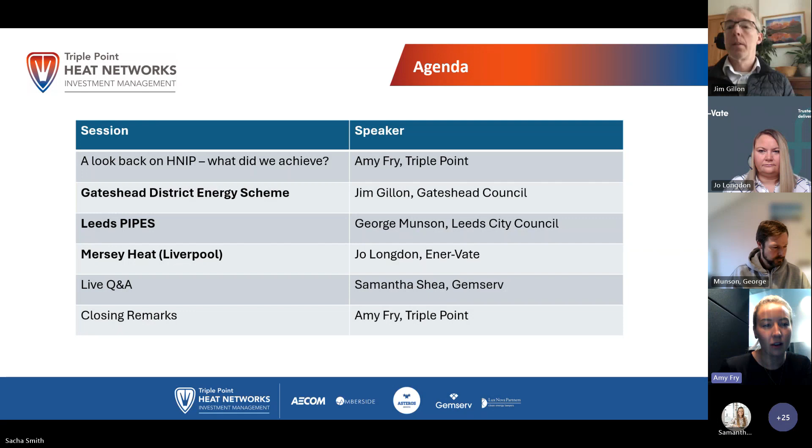Perfect, thanks Sam. Hi everyone. Sacha, did you just want to pop over to the next slide? Thank you. So yes, as Sam said, thank you again for joining us all today. My name is Amy and I'm a relationship manager for Triple Point. I'm currently working on the Green Heat Network Fund, which some of you might have already heard about, but I did actually join Triple Point back in 2019, so just coming up to 5 years, and we had just launched the Heat Networks Investment Project, and I actually had the pleasure of supporting all 3 of these projects, so I was able to give them the good news of the funding.

So what was HNIP? Well, it was a major government scheme which provided funding for heat network projects up till March 2022. Both the pilot and the main scheme invested up to £320 million for projects across England and Wales. And as I just mentioned, this scheme was succeeded by the Green Heat Network Fund, and that is also now currently open for applications. So one of the key aims of HNIP was to create a self-sustaining heat network market.

It's obviously had its challenges along the way. We've had to manage some things such as Brexit and COVID, but despite those obstacles, it has without a doubt increased the number of strategic low carbon heat networks across the UK. It's also demonstrated that heat networks have the ability to meet consumer needs. I personally have seen it boost the supply chain and the capabilities in the sector just through my interactions with the projects and players in the market over the last few years.

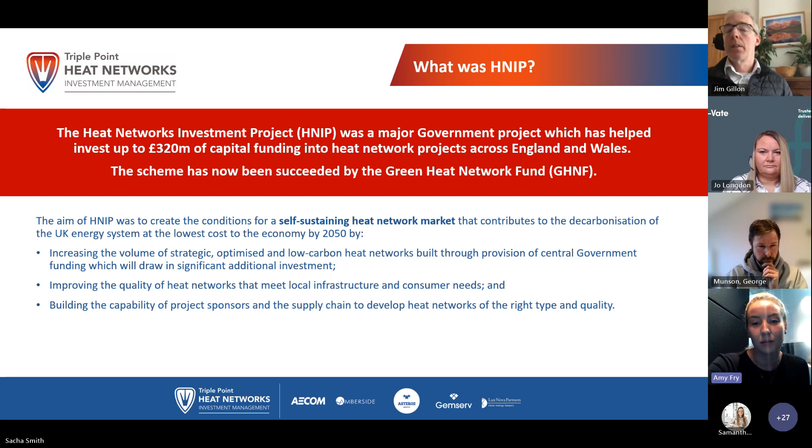Sacha, did you just want to pop to the next slide? Thank you. So the scheme was launched, as I said, in 2019. This was actually before the government committed to their net zero targets, and we hope it will play a significant role as we continue to work towards 2050. Around £270 million has been offered to eligible projects under the main scheme, and to the right, that map just shows a few of the funded projects across the country. Total capex of schemes funded is more than £700 million, and this is across public and private sector projects.

We also hope that once fully built out, these projects will supply low carbon heat to more than 75,000 residential connections. The projects funded under HNIP often represented a first initial phase of work. So actually within the backdrop of zoning and all of that work that's around the corner, we expect these projects, and we know that they will expand into citywide networks that are capable of moving the dial on the scale of heat networks in the UK.

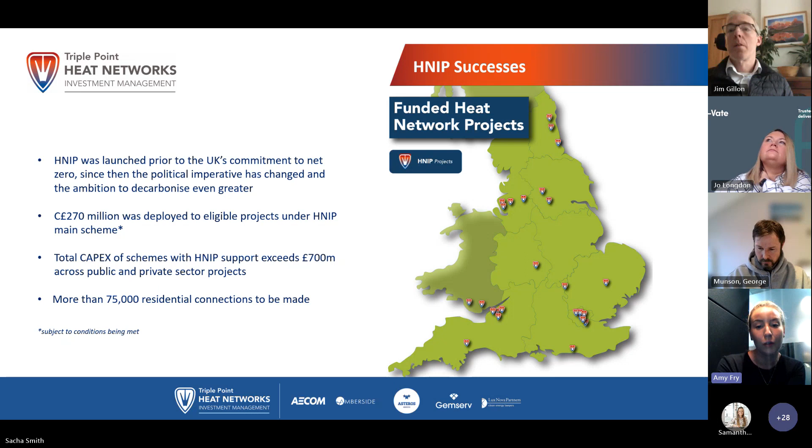Next slide, please, Sacha. As well as direct funding, the HNIP has helped to professionalise the market. Many of you might have heard of and also engaged with the BHIVE. So this was actually launched under the previous Department of BEIS.

The BHIVE is a DPS platform for public sector partners, public sector projects to procure funding from a range of investors and also funding related services. This is currently running until March 2025 and can be used independently of any applications to funding.

We've also created and issued resources to help project sponsors understand funder requirements. So when it comes to due diligence, helping them to demonstrate that their projects meet the minimum requirements and ultimately allow them to have greater certainty of what an investable project could look like.

We also issued a series of heat contract templates. I know a lot of the projects already have used these. These were created by our energy legal experts, LuxNova. They're now sort of best in class industry standard documentation for the starting point of contract negotiation and creation. More information about the BHIVE and also both sets of these resources are on our website.

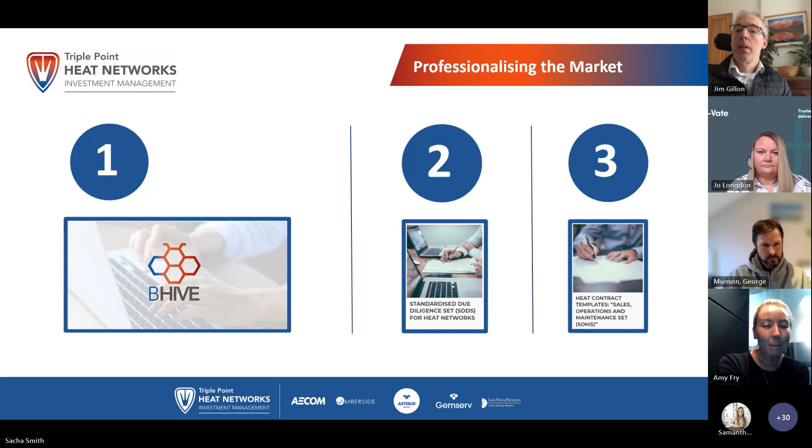I am going to hand over today to 3 projects. So we're hearing from Gateshead, Liverpool and Leeds. Sorry, Sacha, just pop to the next slide. Sorry. So yeah, 3 projects today from Gateshead, Liverpool and Leeds. And sorry, Sacha, do you want to just go back?

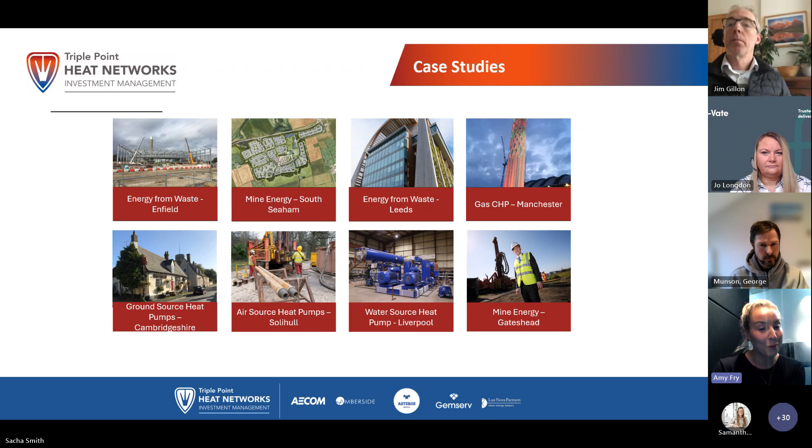This just showcases some of the technology types that we've funded under HNIP. Quite a few of them actually, we should have some case studies on our website as well. So if any of the presentations inspire you or any of the projects that are listed there, if you'd like to talk with any of them or just find out a little bit more, then please do get in touch. And I think now I will be able to hand over to Jim. So Sacha, you can go over to the next slide. Thank you. Over to you, Jim.

Thank you, Amy, and thanks all for letting me come and share our experiences. I'm the Service Director at Gateshead Council for Energy Design, also responsible for running Gateshead Energy Company. So next slide, please. So we've had a network in Gateshead since 2018, and this is the current extent of it. The green is what we built initially back in 2018, and we've just, using some PSDS funding, extended it down to the east on the blue there.

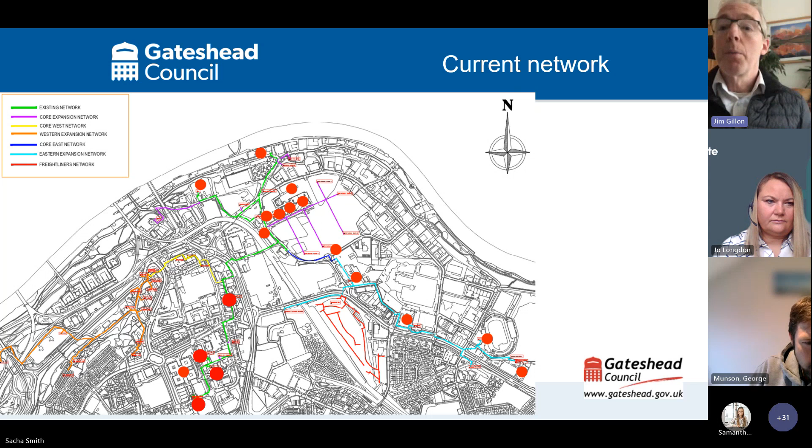So we've currently got about 5 kilometres, and if you do the next slide, please. We're up to about probably 23 customers on our network. We are both a heat and a power network because we started off using gas CHP as our main energy source, and we've always needed to then work out how we look to decarbonise as we expand. So those red ones there, they're the expansions where we've got HNIP funding to grow the network, as well as introducing some renewable heat to the network.

So next slide, please. So we're lucky enough to have 2 HNIP projects currently. The first was largely to fund a mine water heat pump and also extensions to the network. And I should say, when we initially bid for the HNIP, it was to actually look at river source heat using the River Tyne. However, early in the feasibility phase before we got into design, just liaising with the Coal Authority, it was maps like this that showed us we had a massive resource for mine heat underneath the town centre, which was a warmer temperature, closer and probably far lower cost than trying to tap in to the river, which got down to about 5 degrees in the winter.

So if you next click, please, Sacha. You'll see here, this is some of the seams. We've got 6 worked seams underneath our feet, and that's what we found was key for mine water. You need multiple seams and multiple targets because you don't always get what you find. And so having a variety of sources is key to a successful mine water scheme.

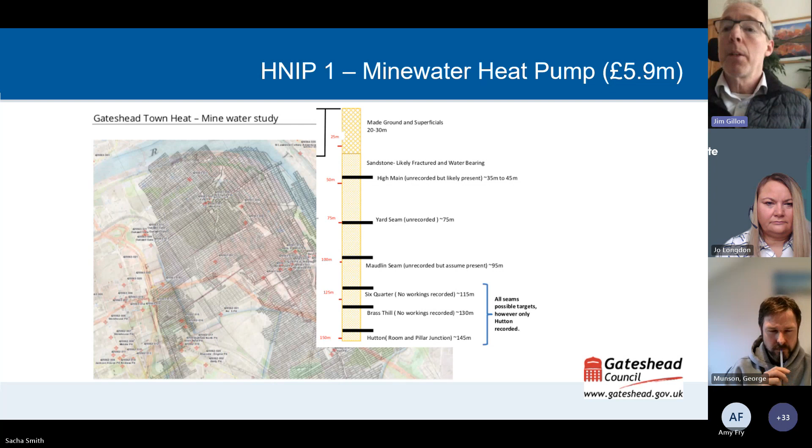Next slide, please. So long story short, 2.5 years later, we now have an operational heat pump scheme, the largest mine water heat system in the country, comprising 2 abstraction holes, 1 reinjection hole. We get a stable 15 degrees from our water, and at peak flows, we're using about 140 litres a second, which is about 2 bathtubs a second. And thanks to using a very efficient ammonia heat pump, we're achieving 80-degree flow temperature at decent COPs of 2.9.

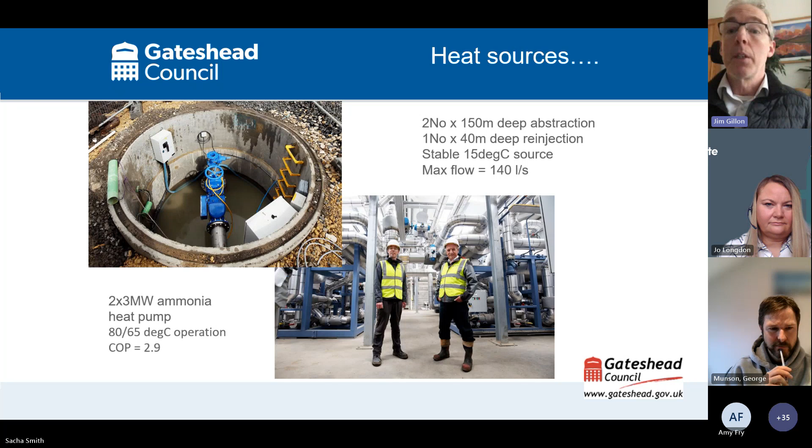Next slide, please. We were fully operational by March 2023 last year, where we had all our permits in place from the Environment Agency, Coal Authority, and we submitted our final request to get the RHI banked, which is going through the final stages of approval now. Next slide, please.

So this is effectively how the mine water scheme works. Thanks to colleagues at the Coal Authority for helping prepare this. And I should say we engaged the Coal Authority from the very start, using their innovation team to really help with the mine water feasibility, then finding targets, and then we kept them on through design and construction because their expertise in drafting specifications for boreholes, tendering, managing the drillers, that's what's been a key success for our project, and I strongly recommend others to use their excellent sources going forward.

So we have 2 abstraction holes from about 150 meters deep, which pull up the water at a constant 15 degrees. That's chilled down to about 8 or 9 degrees, and we put that back into the upper workings, and that keeps it separate from the lower workings. So we haven't seen our source temperature degrade over the last year and a half.

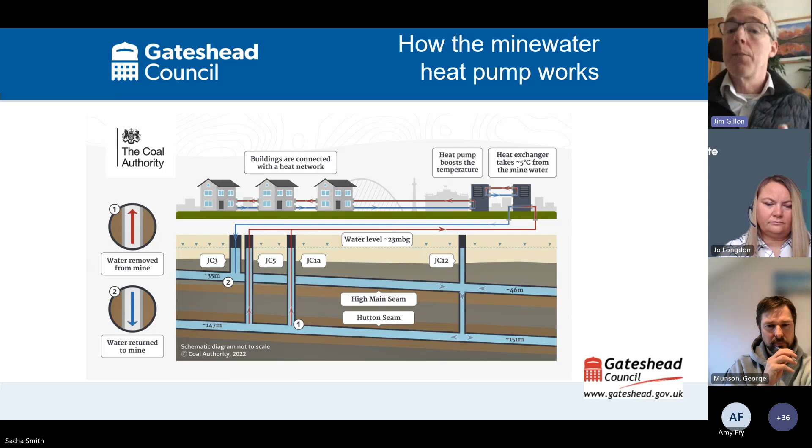The innovation we needed was the Coal Authority designed something they called a vent hole, which is that one called JC12, and that basically was new for mines, and it was new to the Environment Agency, but it's been fully permitted, and that basically helps us depressurize the lower workings to allow us to extract those high flow rates without seeing massive drawdowns in the mines, which is important. Next slide, please.

So having built that, we're probably fortunate in Gateshead that we also have another 2 mine water heat pumps at a company called Lanchester Wines. And so this goes on to some of the social value that we're getting out of the scheme. Now, the Coal Authority have invested in extra monitoring boreholes between our 2 sites, because we're the only place in the country where there's more than 1 mine water heat pump. And that means they can then create geothermal models of the mines to then basically tell how many of these we can permit in an area.

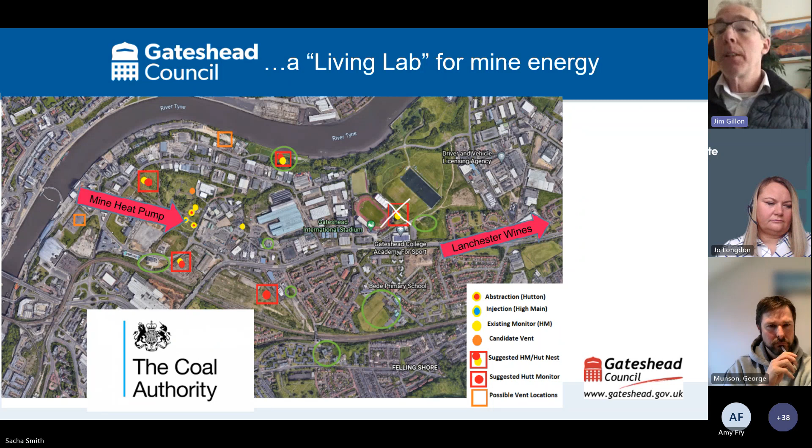Next slide, please. So you won't be able to see this, but effectively this is the geology that we're pulling from. Our boreholes are on the left, Lanchester are in the grey areas on the right, and effectively now the Coal Authority and partners have got a working hydrological model, so that they can basically work out how many of these you can start permitting in given mine blocks. And so that should help really set the bar for how many permits the Coal Authority can release for other schemes elsewhere in the country, really helping the proliferation of these schemes. Next slide, please.

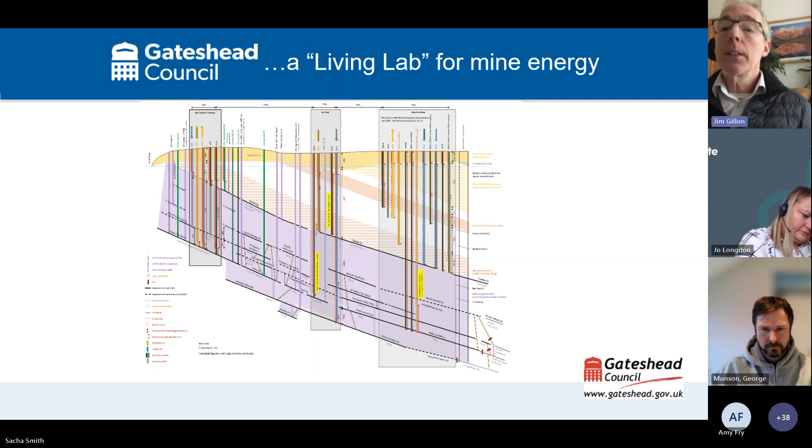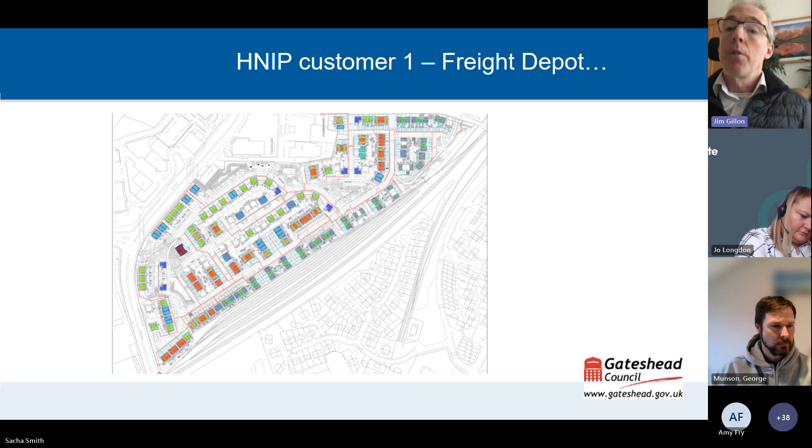So it's not just about heat, it's about connections as well. So this is one development. This is 270 homes new build, which are now fully on a heat network. And if you show us the next slide, we're starting to get those pipes in the ground. We've got about 45 properties connected so far. Again, using innovation in terms of bringing in twin pipe solutions. So this is a single carrier pipe with the flow and return inside. And we found that really helps get the dimensions down, because developers are used to a single gas pipe, and so they balked at having twin pipes going through their new development, and that's been helping.

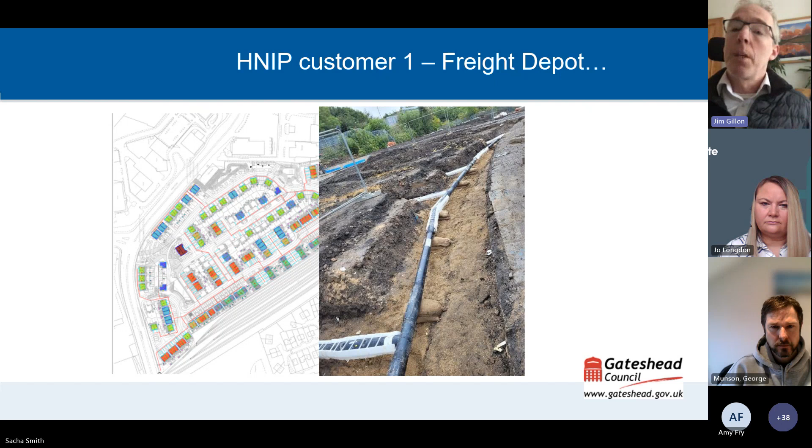Next slide, please. You can see here again how we interface our installations with the general build. We have to follow their build program, and we like to be the first utility in, so that water and comms and power come after us. But that's really worked well. We've taken the developers on a journey that will see that fully built out in the next 2 to 3 years.

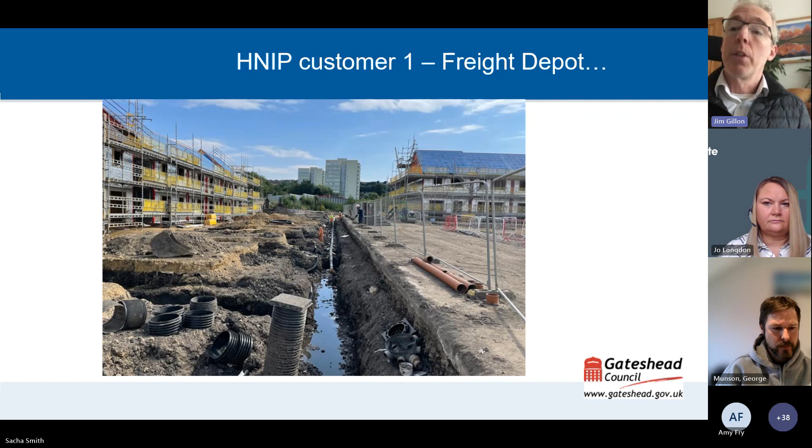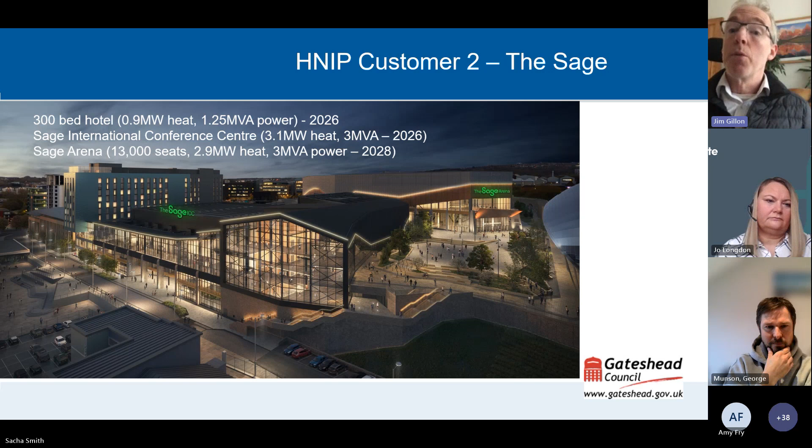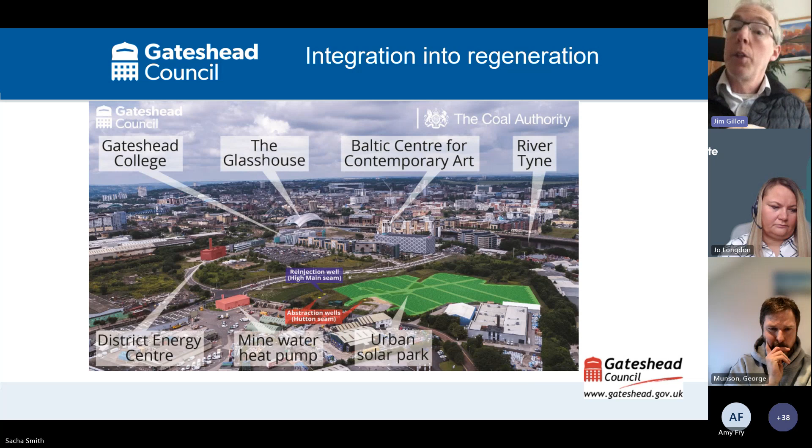And with that in mind, this is a snapshot of Gateshead Town Centre, and you can see on the left how we're integrating our energy generation assets, the existing energy centre and our mine water heat pump, with redevelopment in some of our brownfield areas. And all of those noted there, they're customers in our network. And you can see there the location of the boreholes, how we've tucked them into some brownfield land that you can still develop around. And also it's linked to a new urban solar park that we were fortunate to get funding for. Next slide, please.

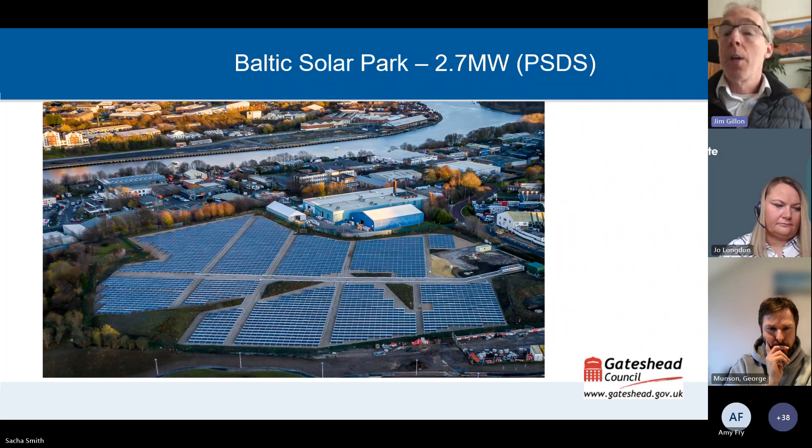So again, through PSDS, we were lucky enough to get some funding that's now installed that solar park that's providing green power to our private wire network, and often surplus power that allows us to run the heat pump. So next slide, please. So this has been a milestone year.

Since we were operational with both systems from early in the year, we've started massively to see the percentage of renewables increase in our network. Power has topped almost 50% through the summer months. And heat, while we've had some snagging issues, so we're not fully operational yet, but even with the lower outputs, we're still seeing the carbon content of heat coming down as well.

And we're targeting probably about 30 to 35% of our heat will come from the mine water system when we're fully past that snagging. We still have a base load that needs to run on gas CHP, but it will grow over time. Next slide, please.

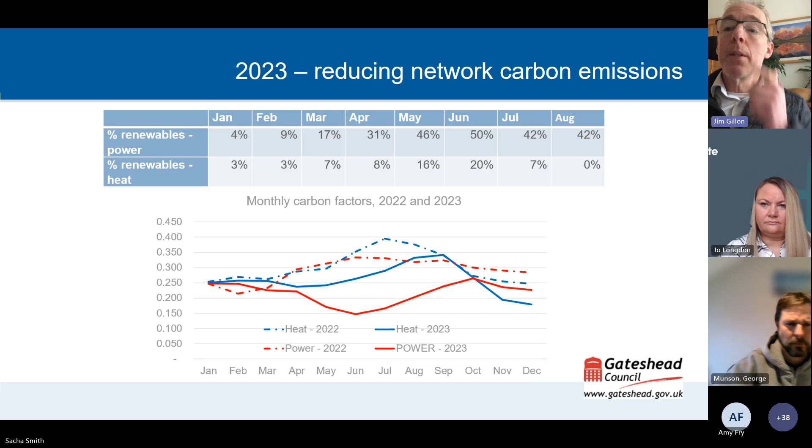The second project we've got is looking at how we take heat networks into social housing. When we look at the borough, we have 15,000 homes on low-rise social housing networks, and on paper, it's more cost-effective to look at heat networks as opposed to individual heat pumps.

And so this project's been stalled because we've had to wait for construction inflation to calm down. We've had to wait for borrowing costs to calm down, but we're now through design stage, and we've got commitment to do a pilot where we'll test the first 16 homes to try and get us connected to the heat network. So next slide, please.

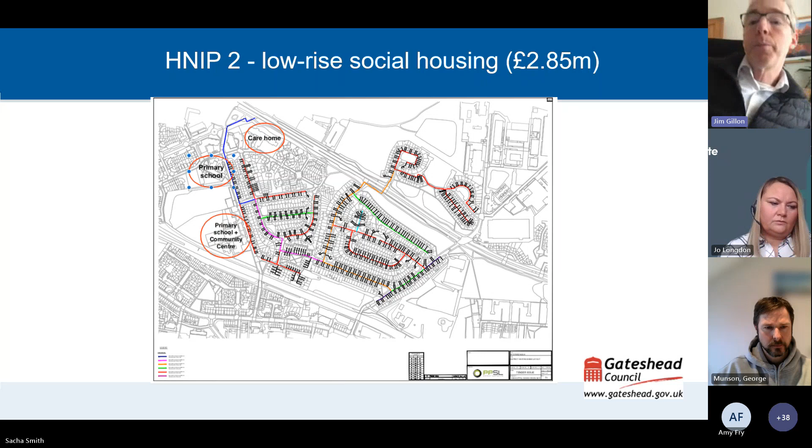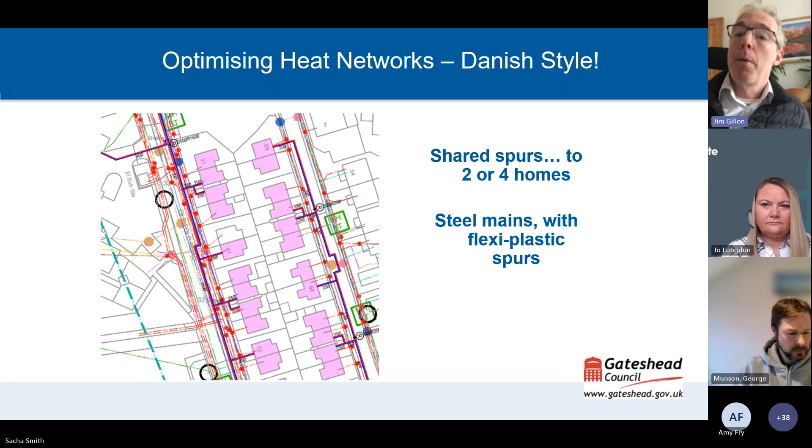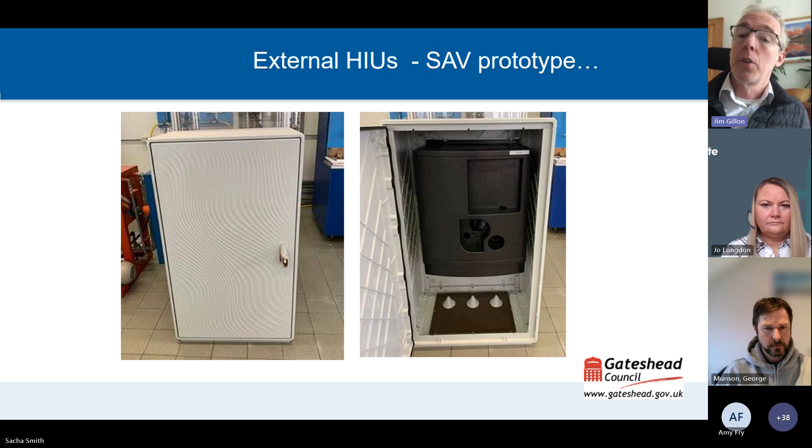These networks are costly, so we've had to really use some mentoring experience from our Danish colleagues to design them to minimise costs, minimise spurs, choose the right material. Next slide, please. We've also worked with SAV, an HIU supplier, to develop an external kiosk, so the HIU goes on the outside of the property, massively reducing connection costs.

Next slide. And also we're hoping to go down the route of trialling whether we can share an HIU between properties on a semi, which again further reduces cost. And all of these are needed to cope with the higher meterage you need for a network like this. Next slide.

So that project will hopefully get into construction fully for the whole scheme, 500 homes by the autumn. But I think beyond HNIP, what we're seeing is with some of the capacity and efficiency we're getting, we never thought we'd be able to extend the network as far as this, but we're now able to look at taking the network down 3.5 kilometres to our nearby hospital. That's part of the PSDS bid that's just gone in.

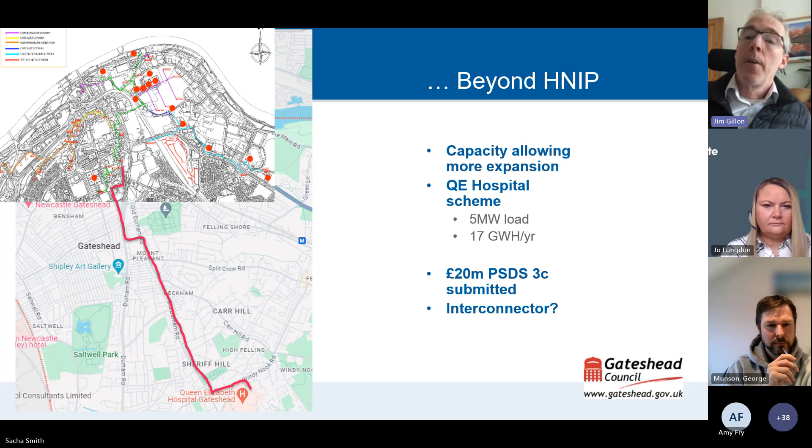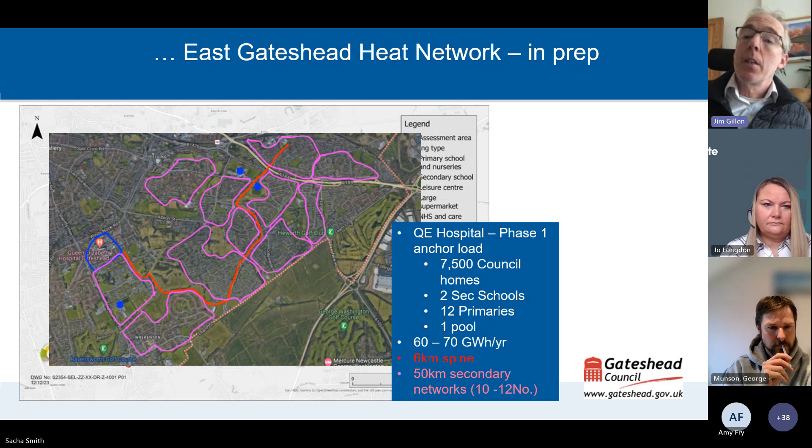And the strategic importance of that, if you go to the next slide, is when we combine having the new heat source and hopefully proving concept for low-rise social housing networks, when we get to the hospital in the blue there, basically it's next to probably about 13 housing estates, totaling about 7,500 homes, and probably another 2,000 to 3,000 private homes interspersed within that. And that's the kind of scale we think we need to go at for our next heat networks. If you do the next slide, please.

The reason for that is we're really pushing, trying to improve the supply chain and get much more local growth in jobs and skills to deliver the heat networks. We've got a great pipeline in the northeast, but some of the work we've done so far, even when we're doing 20 to 30 million pound schemes over 1 to 2 years, it's not sufficient for suppliers to invest in local gangs, local teams, local welders, local manufacturing to do that. For that, they need 5-year contracts plus, which is what they get from the utility companies.

So we were fortunate to get some funding from Innovate UK to do 3 things: to get communities on board with DH, to get the supply chain skilled up and ready for these bigger contracts, and to help us with the legal and financial structures we need to deliver at a much bigger scale and pace.

Because we think if we achieve that, the cost of delivering will go down, but also will stimulate developing a regional supply chain for heat networks, which is only going to increase jobs, growth, skills. And for us, we think it's probably the best opportunity we've got for a green economy supply chain growing in both Gateshead and the North East region.

I think that the thing that strikes me about Gateshead is just how many different heat sources there are going into a single network, which just gives it a huge amount of resilience, which is something we're aiming to do in Leeds. So what I'm going to do today is just give a quick whistle-stop tour of what we've built in Leeds. Next slide, please.

I'll look at what we've built, why we built it, have a look at the 3 phases of growth. I think we're unusual in that we built our first phase just prior to HNIP coming along. So I'll talk a bit about that and some lessons learned, and then talk a bit more about phases 2 and 3 with HNIP support and what we learned from those. And then just look to the future as well. What are we aiming to do over the next sort of 5, 10, 20 years?

Next slide, please. So if we take a look at why we got involved with district heating in the first place, it was predominantly because we had an opportunity that landed on us, that we had to get rid of our municipal waste. We needed to build an energy from waste plant. So we took the opportunity then to locate that energy from waste plant relatively close to the city centre, which meant that the waste wagons weren't disappearing off into the rural hinterland to drop off waste. They were right within the city centre, but critically it gave us that opportunity to bring in low carbon heat.

The big thing we did was work really hard with our directors and with elected members just to get the message across about how much this is a win-win opportunity. There's a really clear political message about using spare heat from burning waste to keep vulnerable people warm. And that message really helped us to get the large investment over the line. Next slide, please.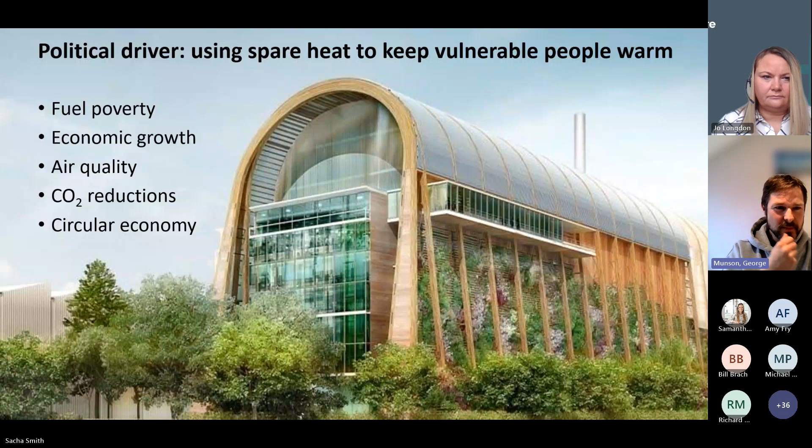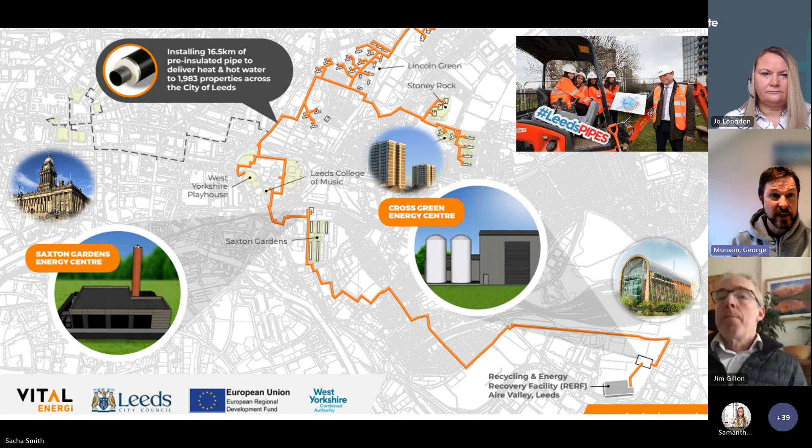Next slide, please. So in terms of the lessons that we learned from delivering that project, it was clear that there are circumstances where local authorities are best placed to lead and deliver heat networks. For this particular project, it didn't make financial sense because we planned to build a network that was oversized with all the key elements designed to take all the 20 megawatts of heat available from the energy from waste plant and bring it into the city centre. But with only 2,000 flats as your key customers, it doesn't have a business case.

So what we did, we worked with our members to present to them a number of realistic scenarios, from worst case to what we thought at the time might be a best case, and just got them comfortable that we could invest and, using our planning powers and our convening powers, we would likely then bring a whole bunch more customers onto the network over time. But if you present that to the private sector, they'll say, fine, we believe you, but you're going to pay maybe 12, 13, 14% for the privilege of having a non-de-risked project. So we took the risk. We took the risk and believed that we could do it.

It's also really important that you prepare ahead of district heating. So we spent a long time working with our planning colleagues. We developed a local development order, which just gave pipes permitted development rights, which made it much easier for us to lay the pipes. We had planning policy, which supported and encouraged developments to connect. Already mentioned before, senior support, really important to get directors on board.

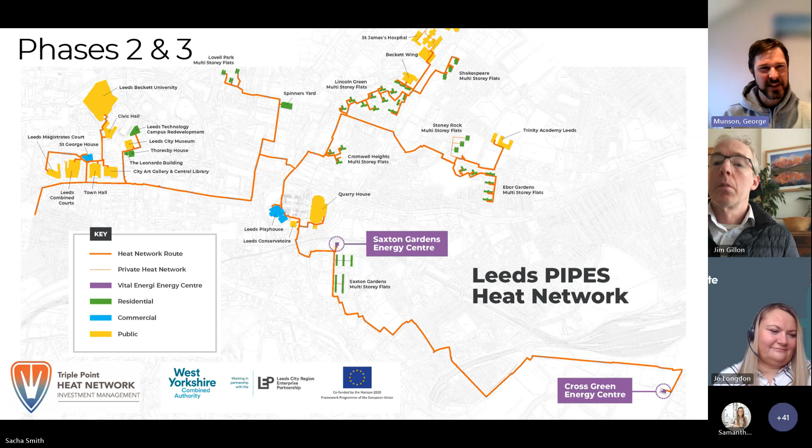Next slide, please. So this is just an example of some of the customers we've got connected on. It's a range of new and old buildings in a range of different sectors, from developers to education, government, healthcare, and of course housing. So next slide, please.

Picking up on the lessons that we've learned across the 4 years that we've been operating this network. The thing that became very clear about 1.5 years ago was that having energy from our main energy source being energy from waste just allowed us to decouple from the energy shocks that were hitting most of the industry. So our heat is indexed with RPI.

So gas prices doubled, tripled. Ours went up by about 7% in 1 year and 10% in the next. So having that low carbon heat source that isn't a major utility is a huge benefit for a network. So really important to look at where industrial waste heat is available in a city.

Another main lesson that's come our way is that developers now really highly value decarbonised heat. So there's very few developers who are looking to push ahead with a gas development now. They're all really looking at heat pumps or district heating. And district heating tends to outperform heat pumps in pretty much every circumstance. So it's a much easier sell than it was just 3 or 4 years back.

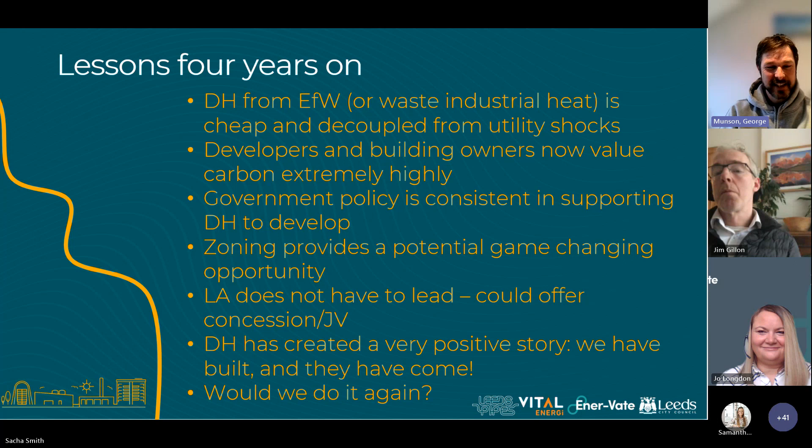We're now working on our phase 4 network. Next slide again. We've got an application in for Green Heat Network Fund support for 2 areas. One's a small extension similar to our phase 3. The other one's a very major extension into the South Bank. This is about a £60 million scheme connecting into a glass factory operated by Verallia, taking waste heat from that with an interconnection over a river back into the Leeds PIPES network to make sure we provide that resilience to both elements of the network.

We're also looking at getting heat from data centres to provide the additional low carbon heat in different points. So it's a hugely beneficial scheme, and the reason we're now able to step up to this sort of scale is from all the experience we've got from successfully delivering our phases 1, 2, and 3.

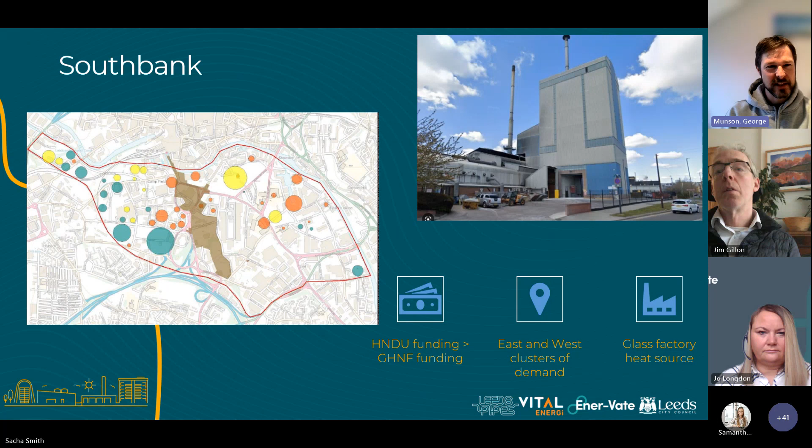And then just the final slide, please, is just looking ahead to the future. So we've been part of the heat network zoning pilots and the advanced zoning programme, which is looking to accelerate the growth of heat networks through zoning. So this slide here just shows our main network in orange in the centre. The South Bank is outlined in purple, and then there's a grey area down to the southeast, which is another energy from waste district heating network that SSE are developing.

And then the overall orange zone is the indicative zone that we could designate within the city. Estimates are that it's about 650 gigawatt hours of heat demand, 175 kilometres of network, 650 million pounds of investment. To put it in context, we currently supply about 30 gigawatt hours of heat. So we're talking about something which is orders of magnitude bigger than the network that we've already delivered. But again, building on the experience that we've got today, we think we've got the right partnership in place to help us to deliver this really ambitious and game-changing network.

So I'll leave it there.

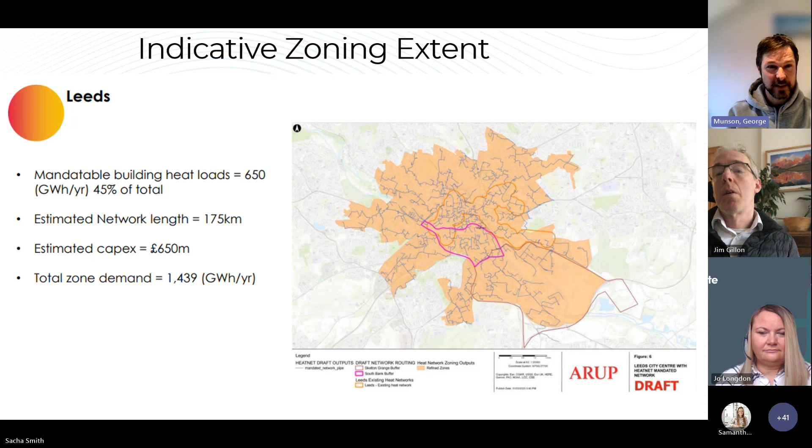Great, thanks, George. Over to Jo to talk about the Mersey Heat scheme in Liverpool. Thank you. So now I'm following two hard presentations, so slight difference here.

So my name is Jo Longdon. I'm a director of Ener-Vate, so we're district heating developers, and I'm here today to talk about Mersey Heat, which we develop on behalf of Peel NRE. Next slide, please. So the scheme itself was originally set up to supply low carbon heat to the Liverpool Waters development, which is a large regeneration project on the

Mersey. We started looking at, okay, what was the best solution to decarbonise the network? We looked at heat pumps. We looked at aquifers, air source heat pumps, sewage heat pumps. We've looked at lots and lots of things. And obviously having a huge water source next to the development, it led us down the path of water source

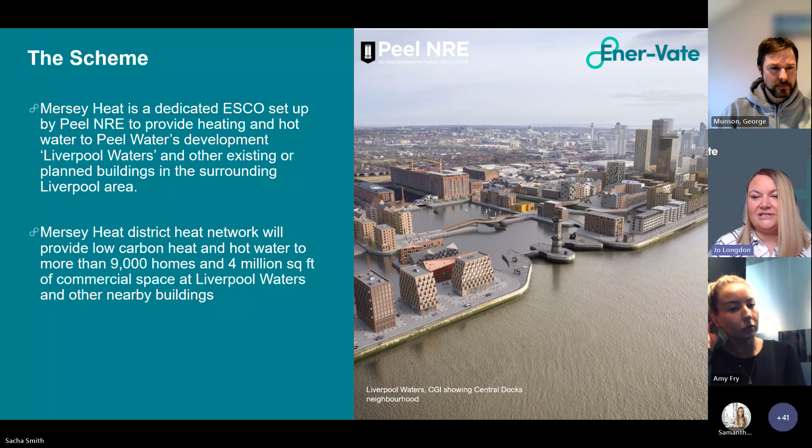heat pump. One of the things we looked at in addition to Liverpool Waters is, okay, what else is around the network? Who else would be interested in connecting? And that's when we started considering existing buildings that were in close proximity. Once the Mersey Heat network is fully built out, the intention is it will supply all of Liverpool Waters, which is around 9,000 homes, 4 million square feet of commercial space, and some of these existing buildings which I'll come on to. Next slide, please.

So this area here shows the extent of the Mersey Heat network. All of the light pinky buildings are planned new developments, and the browny colour are existing buildings that are not within Peel ownership necessarily, but are in close proximity to the network. The dark black box, probably a bit small to see, just north of the Stanley Dock, is the energy centre location. It's called the Great Howard Street location.

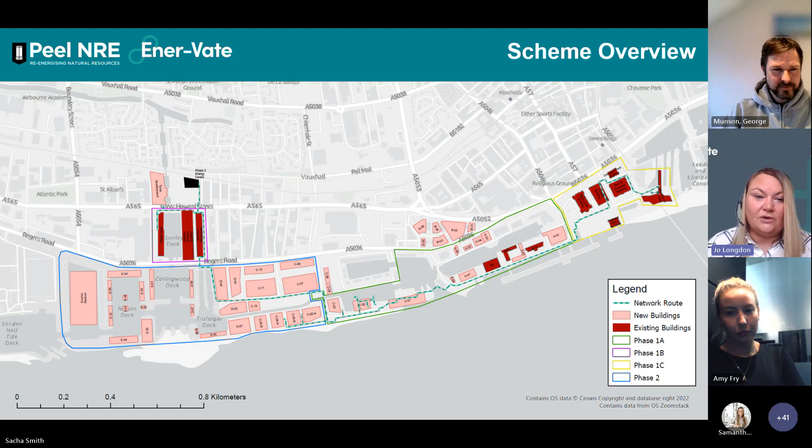It's a piece of land owned by Peel, right next to the railway line, and that is where the main energy centre is being constructed. So we abstract water from the canal and we discharge into the docks. Next slide, please.

So we were successful in two awards. One of the very early ones, it seems so long ago now, sort of pre-COVID, was the HNIP one. We recognised that we needed to put in some infrastructure early to achieve the requirements of the network. The main reason is, as I've just pointed out, Great Howard Street is a little bit away from the main development, and also a little bit away from

the water. So we were having to navigate through some highways works, the main routes were already going through resurfacing, and they're the main routes into Liverpool, so not ones you can easily close off again. They were putting an embargo on, which meant once those roads were opened and closed, we weren't allowed back in for 5 years, and we knew that would cause us a challenge to get to the main energy centre to supply the network. So the first award was to enable some of those early road crossings and link some of the pipework we'd already started to put into the ground.

We were led by a number of developments happening in and around the area, and we'll come on to lessons learned later, but that did mean a bit of a piecemeal delivery of pipework, which you wouldn't necessarily choose if you were going to do this in the future.

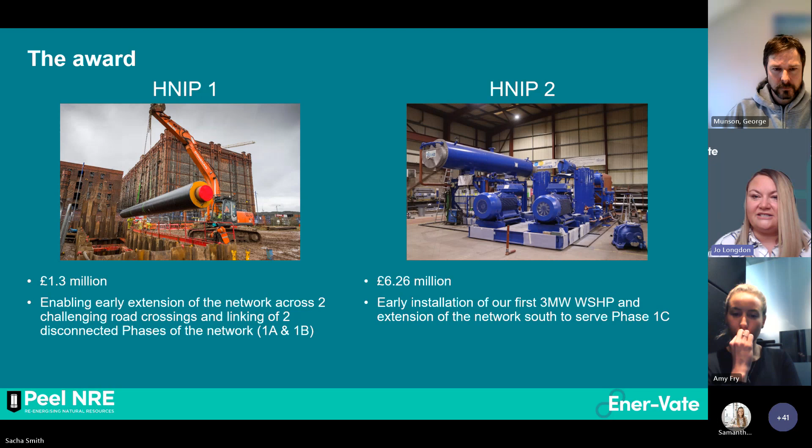The second award, a bit bigger, was to help us decarbonise the network, because originally this was going to be a gas CHP scheme, as most district heat networks were. Then with the changes around what developers were requiring for new build developments, and what clients were starting to request in terms of decarbonisation, moving away from gas, we started to look at the water source heat pump. So the second fund was to help us with that and the economics of making this scheme work. Next slide, please.

So in terms of progress against those awards, we managed to install the DN400, the biggest pipes on our network. We oversized them slightly for the need we had, but we always knew there'd be some future expansion, a bit like George's comment of build it, they will come. A lot of people now show interest, and we're so lucky we did oversize those pipes, because otherwise we wouldn't have had the capacity to supply.

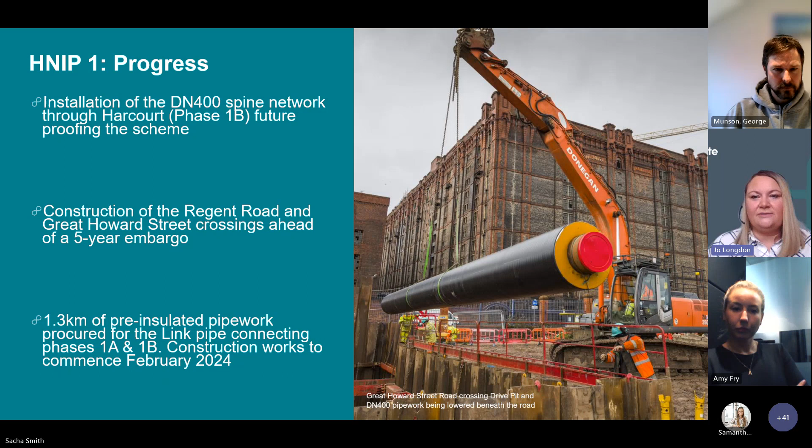We managed to do the construction pieces under Regent Road and Great Howard Street ahead of the 5-year embargo. We ended up tunnelling under Great Howard Street significantly to avoid other services, which was quite costly, a bit of a headache, but it's done and it's buried and it's in. And we also installed the pre-insulated pipework, which joined up some of the earlier pipe that we'd managed to put into Princess Parade in Liverpool. Next slide, please.

So HNIP 2, where are we with this one? Well, we're making good speed now. We had a bit of a delay. There were lots of delays. Everybody had delays around COVID and everything else. We've had lots of delays with managing to get easements and approvals, because obviously this isn't a council scheme. It's slightly different in the fact that it's a third party bringing it forward. But nevertheless, we've made good progress now.

So the water source heat pump's fully designed. We've actually placed the order and it's being delivered in April. So you'll see some more press releases. I'm all about making this press release, this water source delivery. I'm probably building it up way too much from an engineering point of view, but it's quite a big thing for the Northwest to have a 3 megawatt heat pump delivered. So there'll be more press releases coming through on that.

We've done all of the SI, and that threw us some challenges again, even down to when we started construction of the energy centre, more challenges because of its contaminated land areas, and we've had to do some cleaning up. But again, we've worked through it. But one of the lessons learned that we'll come to at the end is probably George's point: you never really know until you start digging what you're going to find.

We've got full planning permission and the energy centre is already in construction. We hope to have heat in November '24 this year from that water source heat pump and have a fully working energy centre which will supply heat to some of the buildings we've currently got on a temporary heat supply.

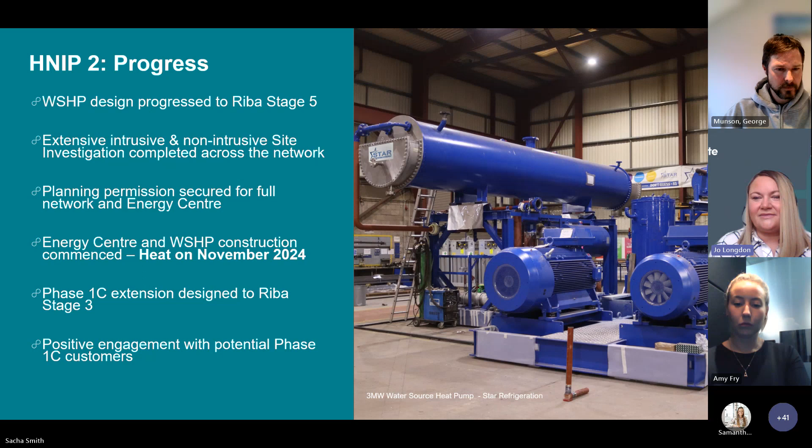Part of the HNIP2 award was to start looking at the extension, if you like, past the new build to some of the existing buildings that were quite close in proximity. This area is the Three Graces area, so large existing buildings, and we've managed to complete the RIBA 3 design on that as well. And we've been having really positive engagement with some of those customers, and hopefully, fingers crossed for some successful PSDS funding, we may be able to connect those in early '25. Next slide, please.

So schemes like this aren't just about delivering a heat network for a few buildings. There's so many wider benefits, and I think with all the zoning and the regulation changes, these schemes will come into their own as being those first starter schemes, if you like. But this scheme in itself is of significant scale. We future-proof the scheme, like I say, low carbon. We're already looking at other sources of heat that may be able to feed into that network as it grows. Currently in the design, once it's at full build, it saves around 4,200 tonnes of carbon against an equivalent of gas, so a significant amount.

Our DBOM partner, which is Vital Energi on this scheme, they've managed to secure over 40 apprentices, and they work on a rotation basis. So a lot of them are getting some exposure to this scheme, and they'll go on, obviously, to spread that into the industry. And it goes on, but there's lots of opportunities for expansion.

There's a construction hub. The Liverpool College brought forward a construction hub actually on the Liverpool Waters site, and the intention there is to bridge that gap between training and employment. So again, that's going to be utilised more now the construction's happening at Liverpool, so people can see: this is what we talk about when we learn in college, and this is the reality of delivering networks on site. Next slide, please.

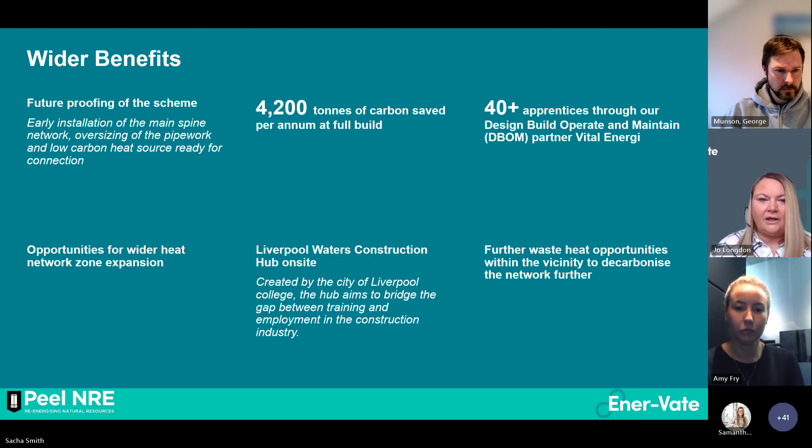We've encountered quite a few. I could give you story after story. Like George says, I've got the scars as well for ground risk. But this is what you get when you're developing regeneration sites that are old dockland. We have all sorts to deal with: unexploded bombs, contamination. There's all sorts buried in Liverpool docks, as there is in lots of other docks, as you can imagine.

But ground risk is a big risk, and you need to manage that contractually. Really get into the contractual piece on that if you're doing this.

Engagement. So we've done a lot of engagement with as many stakeholders as we can. And I think prior to this last year, a lot of people have sort of said, oh, yeah, well, if it happens, we'll look to connect. Will it happen, etc., etc.

Now they can start to see things are happening and there's pipe in the ground and the energy centres being constructed. And developers are starting to say, well, actually, if this gets built, this could actually save me a headache because I've got a low carbon network in the service roads. Then we're starting to see a lot more engagement from people. But previously, it has been a challenge, and it's been a bit of a journey to come through.